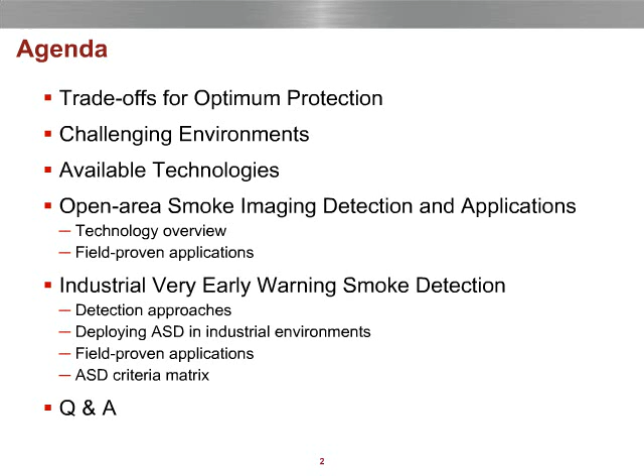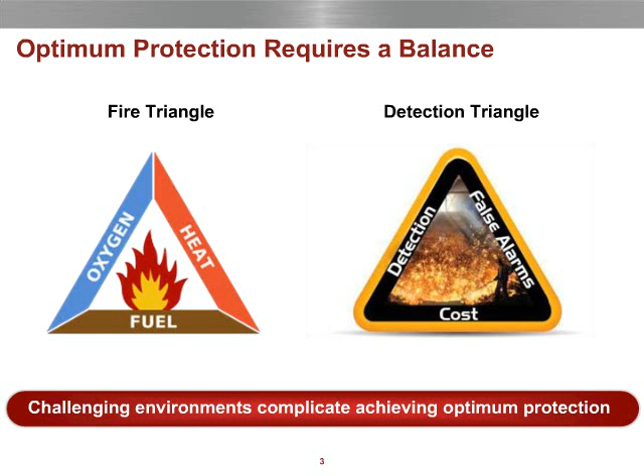We're all familiar with the basic fire triangle. What I'd like to introduce is the concept of a detection triangle, where the three sides consist of the ability to detect a fire, the tendency for nuisance or false alarms, and the cost of installed systems. The objective of the detection triangle is to highlight the interdependence between detection capabilities, the occurrence of false and nuisance alarms, and the total cost of ownership of a system. When this balance is achieved, the net result is an optimum detection solution.

Selecting a detection technology that provides the highest level of detection to ensure protection of property, life, business continuity, and the environment is essential, while at the same time delivering a solution at an affordable cost, both from an initial installation and long-term operating perspective.

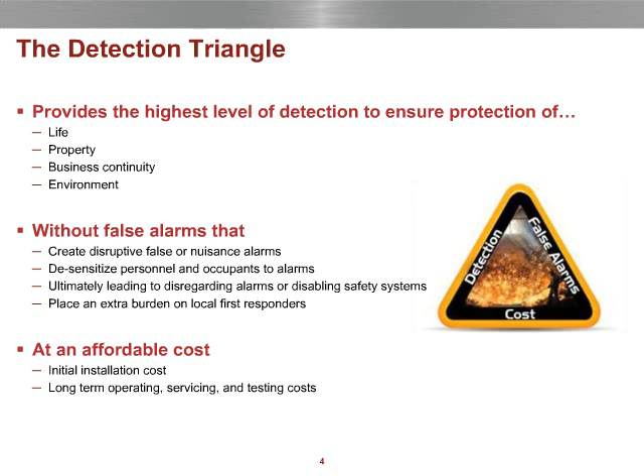Now we're going to discuss the various attributes associated with challenging environments. There are some obvious environmental conditions that make detection difficult, causing false alarms or nuisance alarms, or shortening a detector's life. Additionally, large open spaces with high ceilings or high and variable airflows complicate detection. There's a long list of environmental factors such as dust, dirt, temperature extremes, water, or even the presence of toxic gases, to name a few, that can degrade the sensitivity and shorten the life of a detector.

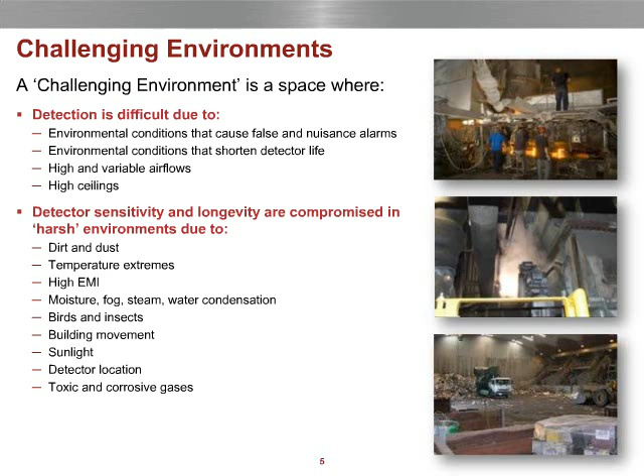Selecting and designing a detection system is very important, but perhaps one of the most overlooked and underestimated factors that contribute to a high-quality, highly reliable safety system is a system's installation and maintenance. Inadequate installation or maintenance can destroy the integrity of a system. High ceilings, confined spaces, elevator shafts, equipment racks, all of these present accessibility issues that can interfere or compromise routine maintenance. Restricted access areas, although not necessarily harsh or challenging environments, can make access difficult, and this also can interfere or prevent routine maintenance from being performed.

When prevention of vandalism or tampering is important for your facility, the ability to install a detector in an unobtrusive manner is required. The same can be said if you have historic buildings or building aesthetics that need to be preserved. When evacuation involves large numbers of people that require assistance, the earliest possible reliable detection and notification is critical.

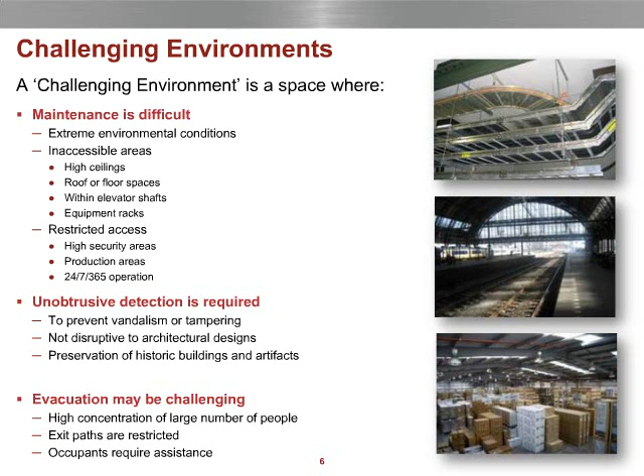This is a simple overview of detector performance characteristics that I've put together to show the relative differences between the various detection technologies that are available. The relative ranking could and will change depending on the specific application.

In this case, I've selected a large open space with high-value content. It shows that aspirated smoke detection affords the best sensitivity to smoke, followed by laser detectors and open-area imaging detectors. It also highlights that ASD would be the best suited to prevent damage to both structural members of the building and or building contents. Aspirated smoke detection, open-area smoke imaging detection, and linear heat detection is shown to be the most tolerant to a wide range of environmental factors.

Additionally, this example highlights the fact that as the size of the space increases, the initial cost differential between spot detectors and aspirated smoke detectors is lessened, if not reversed. It also shows that for large areas, the cost of equipment and installation for both ASD and linear heat are in fact similar.

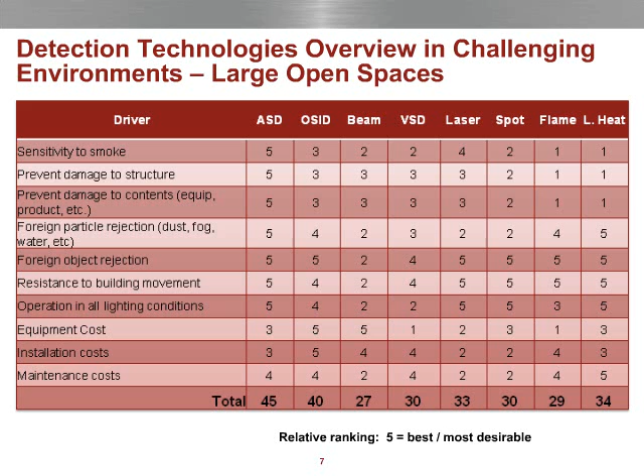In this section of the presentation, we're going to provide an overview of open area smoke imaging detection. Specifically, we'll explore what dual wavelength open area smoke imaging detection is and some of the challenges that it can solve.

Historically, beam detection has proven to be a challenging proposition. This is a sample list of the many things that have caused problems with single light source beam detectors. Innovations have yielded some success in overcoming these challenges, but false alarms because of these things are still commonplace.

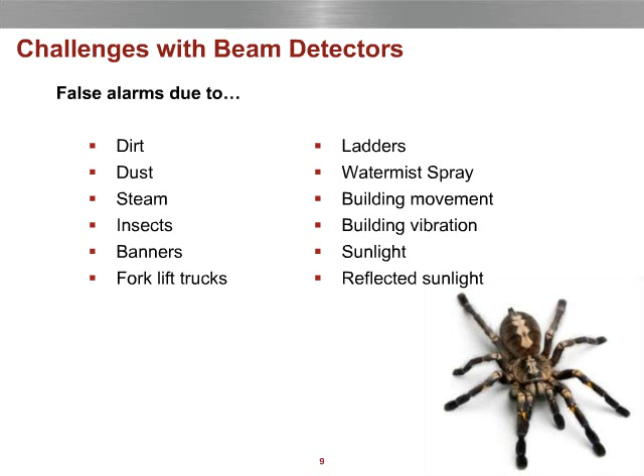What makes dual wavelength different? There are four major improvements to the technology when compared to traditional single IR beam detectors. First, two wavelengths of light are used, both UV and IR. Secondly, a CMOS imaging chip with many pixels, the same technology you would find in your digital camera, is used instead of a single photodiode beam. This provides a wide viewing angle to locate and track emitters.

As a result, the system doesn't require precision alignment and can compensate for drift caused by natural shifts in building structures. The time for installation has been measured to be at least 50%, sometimes up to 60 to 70% faster. In fact, the wide viewing angle enables multiple emitters to be used with a single imager. The imaging chip also provides automatic alignment and movement tracking by software in the imager.

The third major distinction is its unique method for alignment. A ball and socket housing allows a wide range of horizontal and vertical movement. A simple laser screwdriver tool is used for alignment. And fourth, smarter algorithms have been introduced.

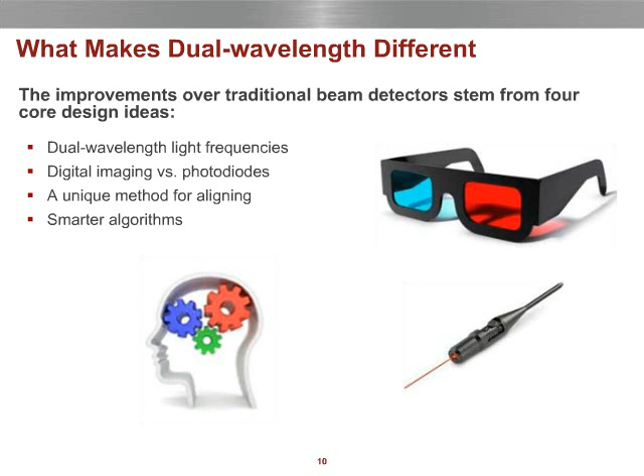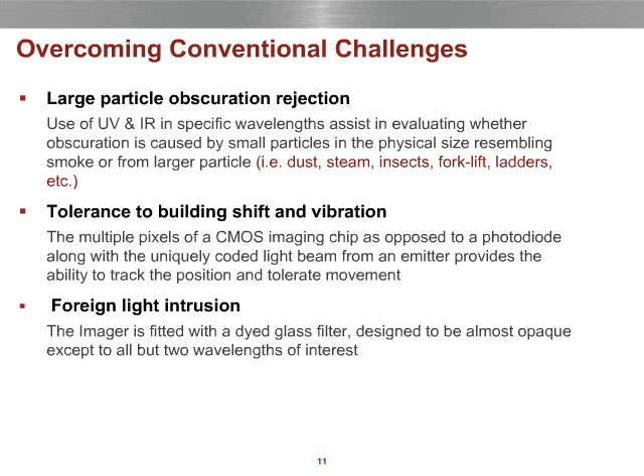The three primary challenges that cause problems with traditional beams are large particle rejection, building shift causing misalignment, and foreign light intrusion. We'll address each of these challenges. This slide shows 3 different scenarios, and I'll explain how a dual wavelength beam transmitting to an imager reacts to each.

Both UV and IR wavelengths outside the human visible range assist in the identification of real smoke compared to larger objects such as ladders, insects, and dust. The 2 wavelengths allow the imager to not only distinguish the size of the particles along the path, but also distinguish the difference between smoke and dust, for example.

The shorter UV wavelength interacts strongly with both small smoke-sized particles and large particles, while the larger IR wavelength is affected only by larger particles. By comparing the relative strengths of the 2, the detector is able to provide repeatable and reliable smoke obscuration measurements while rejecting dust and other solid objects.

The use of 2 beams provides the system with a far superior decision-making process for triggering alarms on smoke while minimizing nuisance alarms. In the bottom scenario, a blockage is shown. The imager loses signal from both beams and will report a trouble, not an alarm condition. If the imager is set on non-latching, once the blockage clears, it will reset itself. Momentary obstructions such as, say, a bird, balls, forklift passing through will not result in an alarm or trouble signal.

The middle scenario shows dust along the path of the beam. Dust particles are large, so the imager will see a small loss of both UV and IR. In this case, it will reject the dust and no alarm or fault condition is reported.

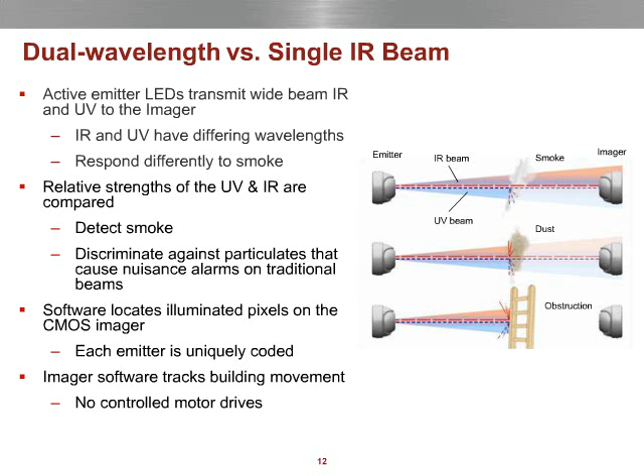There are powerful benefits afforded by the use of open area smoke imaging, specifically the dual beam smoke imaging. The picture shown here is the actual field of view of a 45-degree imager. The diagnostic software is used to produce this image. It's not required to set up the devices. However, it can be useful to make sure that the emitter is actually located in the field of view of the imager. In this case, you'll see 4 emitters in the field of view.

The imager locates and tracks the position of each of these emitters anywhere within its field of view at a pixel level, which allows it to operate under conditions where structure, vibration, or movement exist. In this case, it would take a tremendous amount of movement for the emitters to move out of the field of view of the imager. In fact, the wide field of view allows a plus or minus 2 degree of building movement. At only a distance of 330 feet, this would equate to plus or minus 12 feet. Almost unheard of in the beam detection industry.

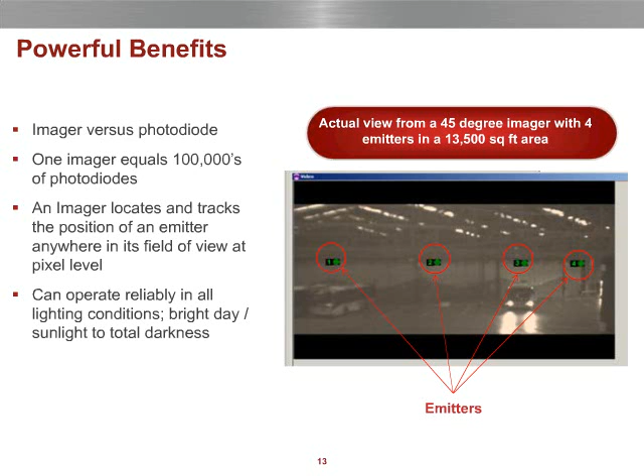Installation and commissioning is really a breeze using dual beam smoke imaging. It's simple. The exact alignment is not required. A unique laser alignment tool is used to only roughly align the emitter at the imager. You'll see one in the picture. This can result in up to a 70% savings in the setup time required, not to mention going back to reset beams that have been misaligned due to various factors.

In addition, when lifted to the maximum of 20,000 square feet, it can outperform traditional beams by up to 50% in length, presently almost 500 feet in length of coverage for one beam detector.

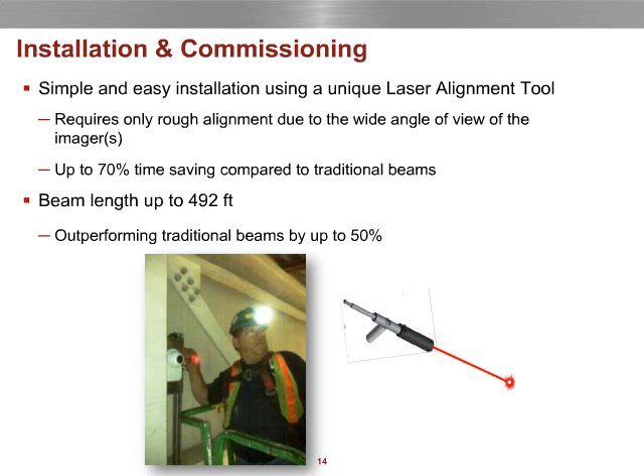Building movement is the #1 cause of false alarms with beam detectors. Correct alignment and commissioning takes the best part of the installation, and it has to be exact, varying from 1 to several hours. Sometimes it even takes 2 technicians to do the work. So instead of gun sights, sight holes, mirrors, thumb wheels, LED and beep aids, and including intensive training on how to set one up, dual beams can be aligned with a simple laser. Because of the only rough alignment, it can be done in just a matter of minutes.

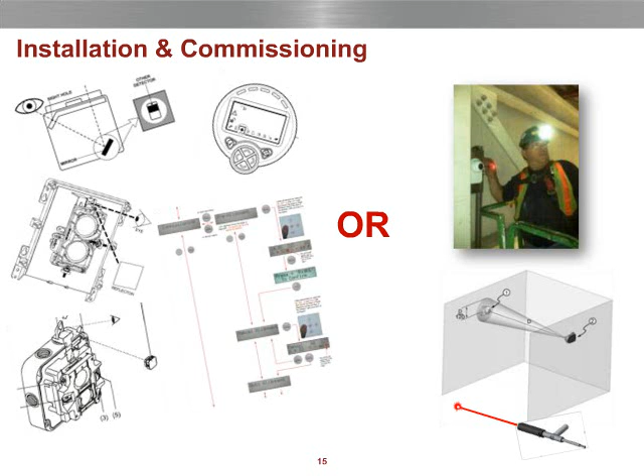What we'd like to do next is take a look at some real-world problems solved by dual wavelength smoke imaging detection. I'd like to mention it works just fine in normal environments. We're showing the more challenging ones today. Anywhere that a traditional beam would be installed, we could use a smoke imaging device.

Let's take a look at long distances. Traditional beams using a single IR wavelength pick up all the airborne particles, which may include anything from dust, steam, dirt, water droplets, etc., you name it. This could result in an amount of obscuration that can be quite elevated during the day. Because of this, traditional beams have to limit their length to sensitivity and vice versa. In fact, it would be hard to have a traditional beam even at a 20% setting at 325 feet.

Open area smoke imaging is unique. It can reliably operate up to 500 feet, again possible only because of both UV and IR being used as the signaling. As both wavelengths are equally affected by larger particles, the possibility of false alarm or trouble signals is almost eliminated.

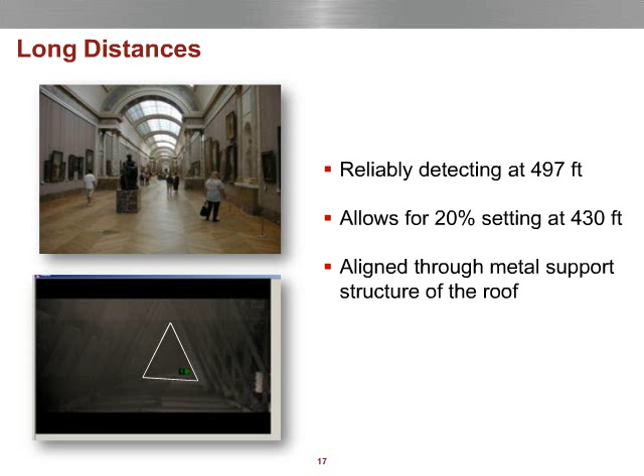The better types of motorized beams need to actually see beside the reflectors they use in order to learn the overall position of the reflector, hence requiring anywhere from 18 to 24 inches of space even to operate within. The detectors at this site were exposed to vibration. There was a large crane that hauls large concrete panels in and out of the building, so the building would shake. It was installed, worked perfectly over 3 months without any faults or false alarms.

The value here to the customer is they had already resigned themselves that the only option was to use a linear heat type device instead of smoke detection. Now they could use smoke detection in the particular space.

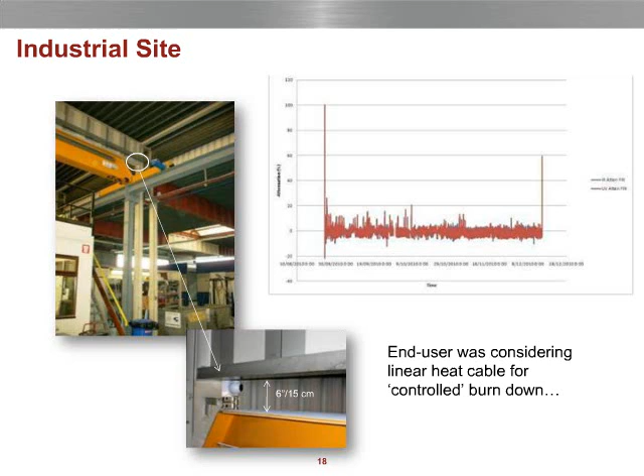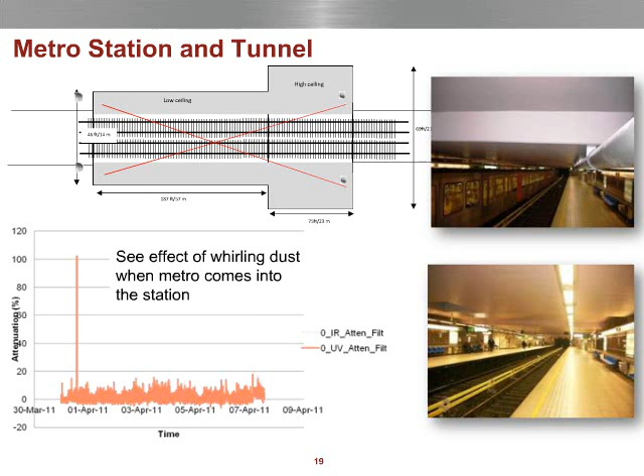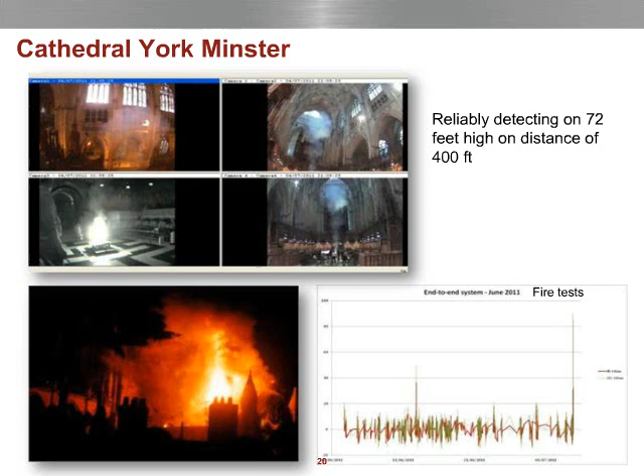This demonstrates the better and higher sensitivity of a dual wavelength detector. Obviously, 20% wouldn't be the setting in this particular case. This sort of information, though, is invaluable when trying to determine the best method of protecting priceless historical sites and at what sensitivity level the smoke detection should be set at.

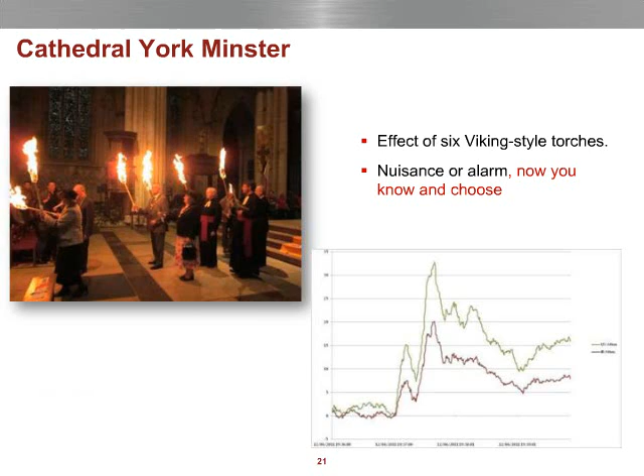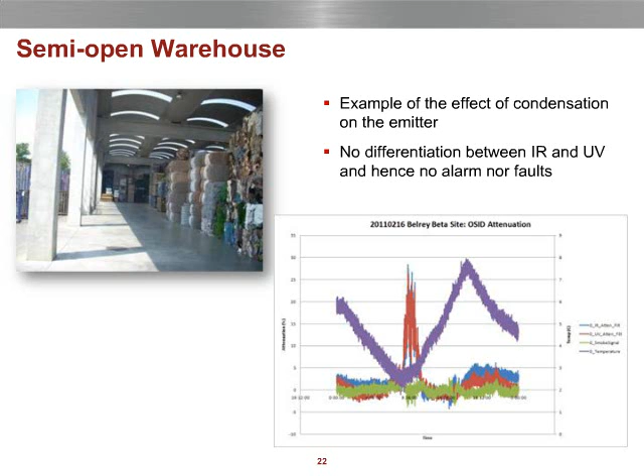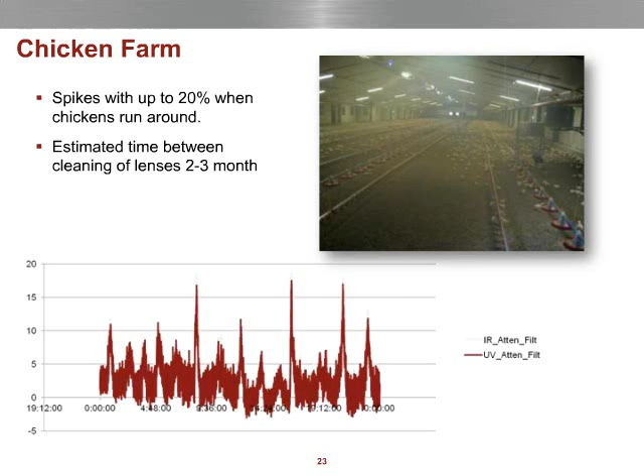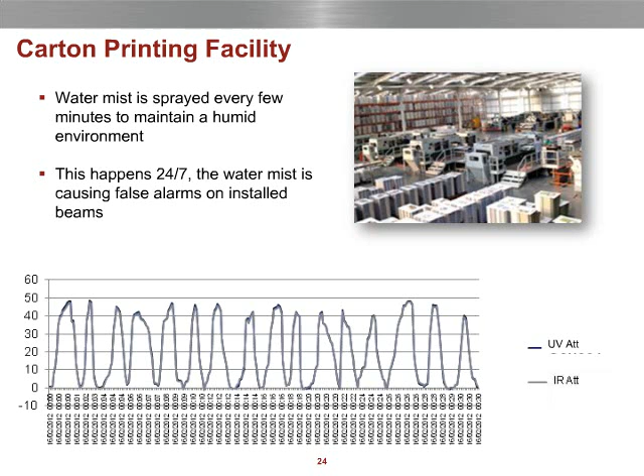One can notice the high obscuration, around 50% in the graph there, each time the mist is re-released. This is a textbook example of where this technology works. Dual wavelengths utilizing UV and IR values did not cause false alarms, and again, they could have smoke detection in an environment they thought not possible.

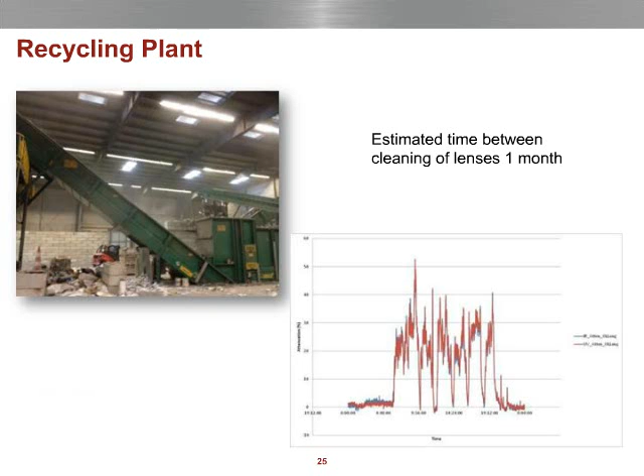Even if one would accept traditional type detectors, beams or spots, and accept to ignore the detection during the day when the people were present, the analysis indicated that lens cleaning would have to be done at least on a monthly basis. This is where industrial type air sampling with filters might have been a better fit. Open area allowed us the opportunity to determine that case.

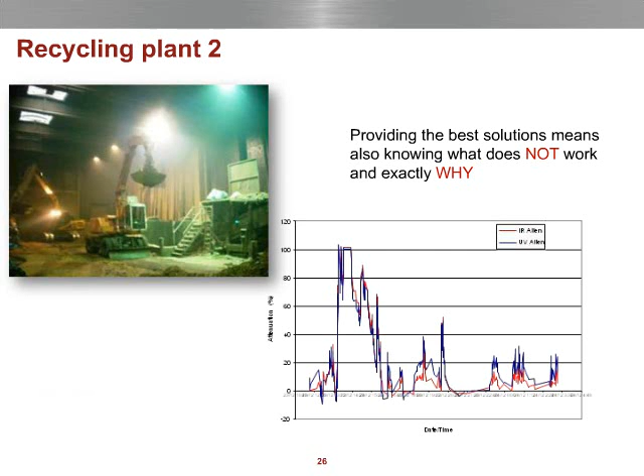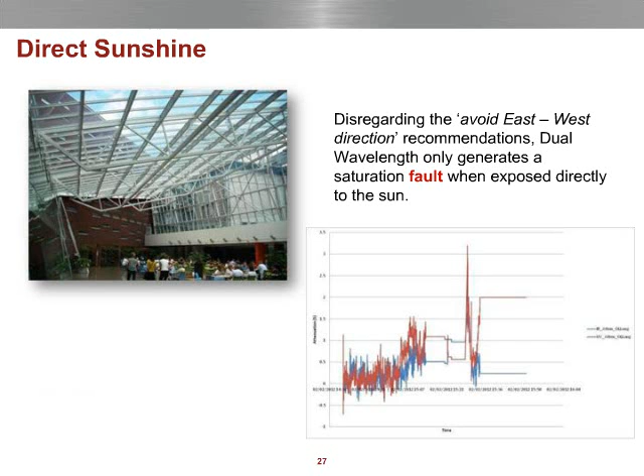Again, dual wavelength can be used in any environment. We've shown you the really hard ones today. And Claudio, I'm going to send it back to you. Well, Steve, thank you very much. You did a great job presenting that technology.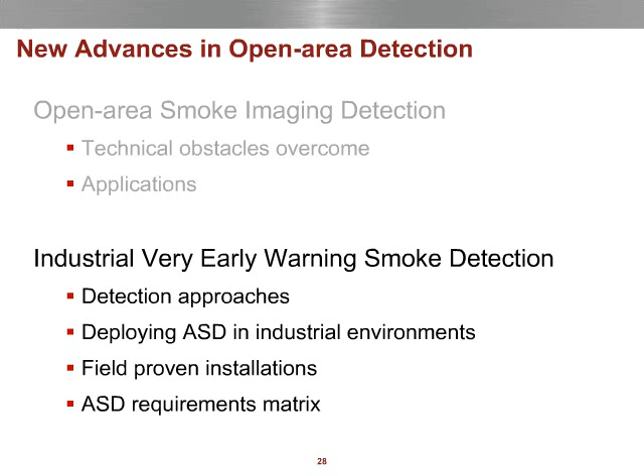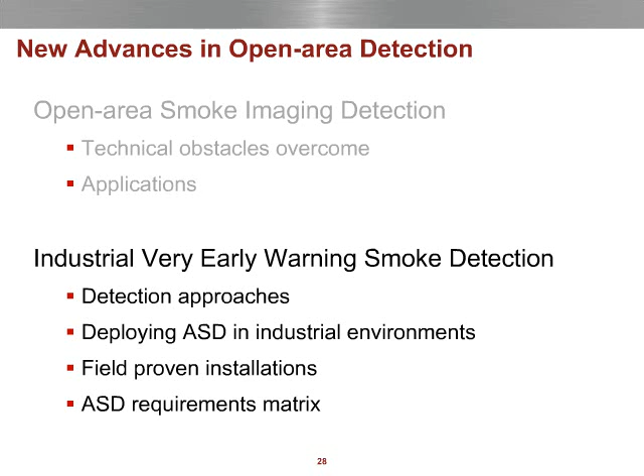Now we're going to shift gears a little bit into a discussion of applying very early warning smoke detection into industrial environments. We're going to review a couple of basic ASD design approaches and how they impact performance, discuss deployment of ASDs in industrial environments, and then we'll follow it by a few proven field installations. And then, as I mentioned earlier, before we go to Q&A, I'm going to present an ASD requirements matrix that you may find useful in helping select ASDs to meet your specific project requirements.

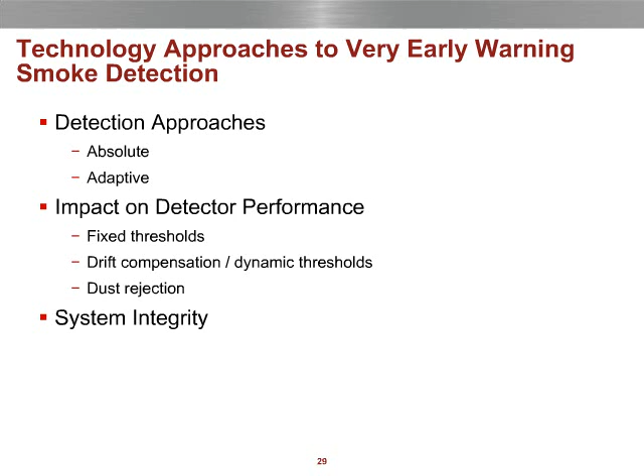So there are several different design methodologies. Today I'm going to talk about two of them. The first is absolute detection. The second is adaptive detection, followed by a discussion of how these approaches are going to impact performance. So let's move on to the next slide here. And let's talk about absolute detection.

It's based on the ability to create a detection platform that can maintain its sensitivity over the life of the detector. One way of achieving this is to utilize a means of keeping the optics clean. This figure shows a clean airstream being passed across the two optical surfaces of the detector. The clean air prevents any smoke or other substances from contaminating the optical surfaces that would ultimately lead to detector drift. This design approach enables you to maintain fixed, consistent, and predictable alarm thresholds throughout the entire life of the detector.

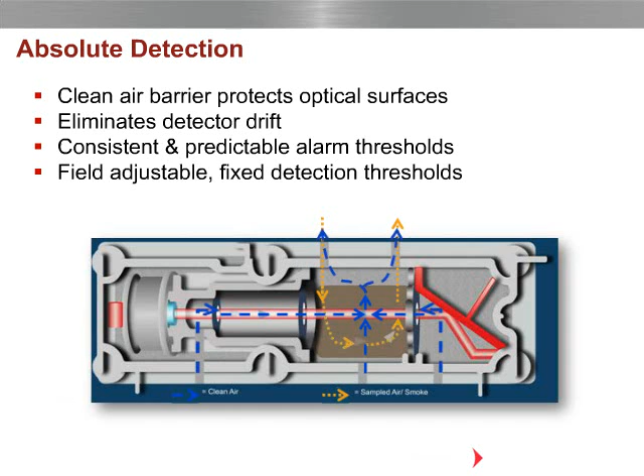But because all environments and background levels are not created equal, the ability to adjust alarm thresholds based on background levels that are present in your environment is important. Here's an example of how it's actually done in the field. The first step is to establish what your background levels are. This is done by measuring and recording the background levels over a period of time. In this case, the average background level is about 0.05% obscuration per foot, with a peak value of approximately 0.12% obscuration per foot.

Once you understand the background levels, you're now able to select your alarm thresholds. These are shown by the four green lines on the graph. The four alarm levels selected for this site were 0.25, 0.37, 0.47, and 0.62% obscuration per foot.

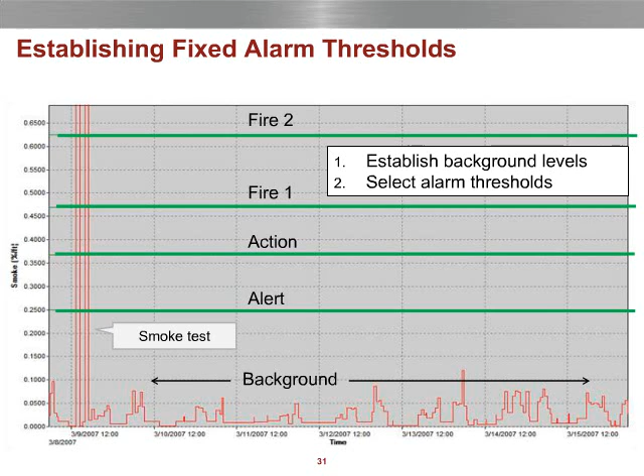Adaptive detection utilizes mathematical algorithms to compensate for detector drift caused by non-smoke particles entering the smoke chamber or electrical interference induced into the detection system. There are two components, short-term and long-term drift. The short-term drift is compensated for by utilizing smoothing algorithms to eliminate short-term non-smoke interference sources. Long-term drift is addressed by adjusting the detector's sensitivity to compensate for changes in sensitivity due to non-reversible contamination or component drift.

This method of detection relies on the ability to predict the rate at which both smoke and contamination enter the detector, or the ability to differentiate between smoke and contamination. The ability of these detectors to compensate for varying environmental conditions results in self-adjusting, drift-compensated alarm thresholds that can change throughout the life of the detector.

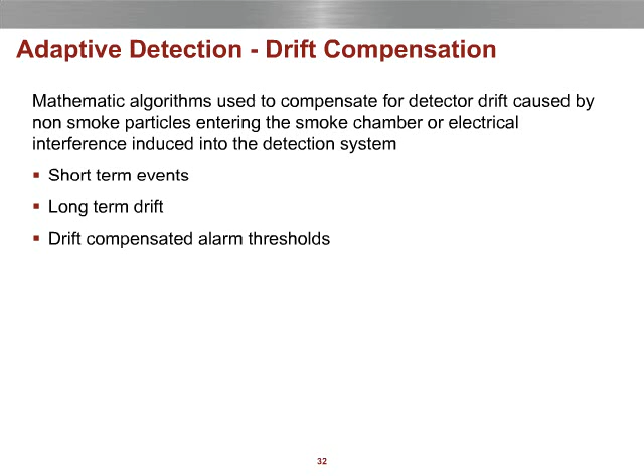The next few slides are going to show basically how these design approaches can impact performance. In this particular example, a smoke test is performed on an adaptive detector. The white line on the right-hand side of the graph is the detector's output during the smoke test. The horizontal red lines are the alert levels of the detector. You'll see that during the test, it actually self-adjusted 3 times, resulting in a significant detection delay.

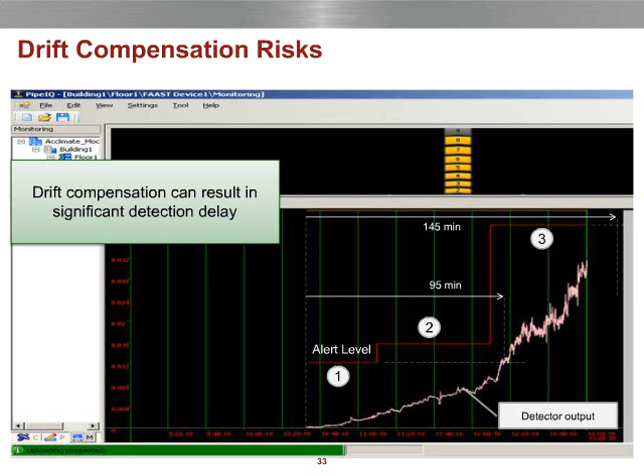What's important when selecting an adaptive-based detection system is to confirm that the fire and contamination scenarios that you expect to occur in your facilities are compatible with the compensation algorithms used in the detectors that you're considering.

Dirt and dust have always been environmental challenges for smoke detectors, regardless of being spot type or aspirated type. But compared to spot detectors, aspirated smoke detection offers more options for dealing with dirty environments. In many instances, all it takes is a good pipe network design to prevent dirt from reaching the detector.

We've already discussed how background compensation can be used to compensate for background levels when you're setting your alarm thresholds. When the background levels or dirt levels are too high, inline filtration can be used. And as with any system, good maintenance practices such as periodic pipe cleaning or installing blowback systems can always help in dirty applications.

Over the years, there have been several patents issued that use multiple wavelengths to discriminate between different particle sizes. These techniques are used to discriminate between white, gray, and black smoke, but they can also be used to distinguish between smoke and other particles such as dust.

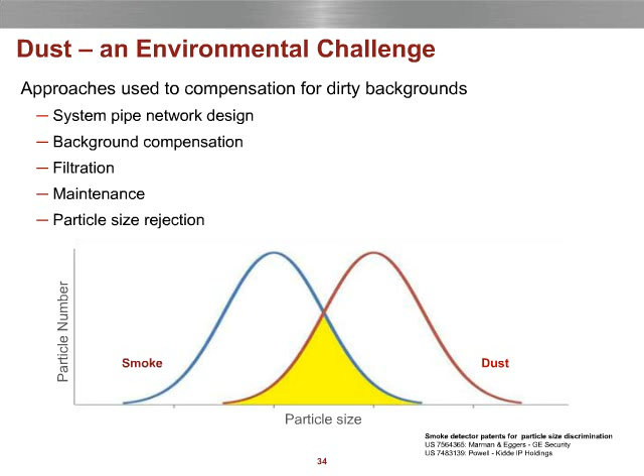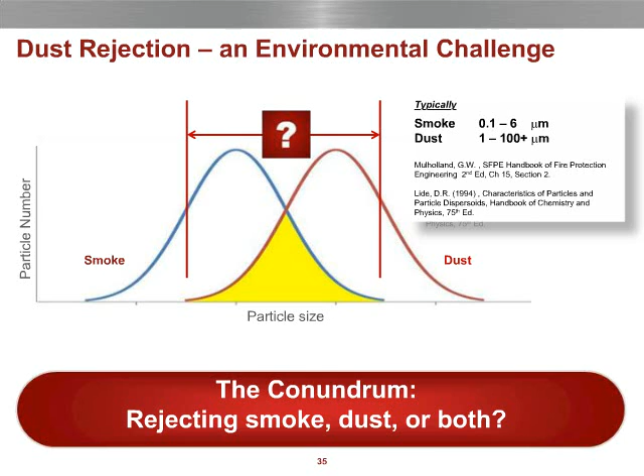The utilization of particle size discrimination for dust rejection is really an enticing idea, but it raises a fundamental question. Are you rejecting smoke, dust, or both? This conundrum arises due to the fact that large smoke particles and small particle dust can be the same size. Discriminating between small particle dust or large particle smoke can jeopardize a detector's ability to detect low energy, smoldering types of fires. These types of fires characteristically generate large particle smoke.

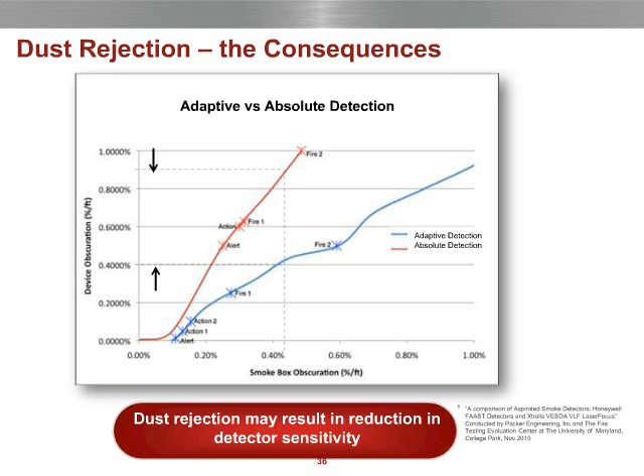What this graph demonstrates is a comparison between an absolute detector and an adaptive detector that also utilizes dust discrimination algorithms. From the graph, you'll see that the adaptive detector is less sensitive than the absolute detector, on average 2 times. Additionally, the adaptive detector did not report any smoke readings below 0.1% obscuration.

This next slide is based on results from an independent third-party test agency, a test that was performed comparing both absolute and adaptive detectors. Extreme care was taken to ensure that both detectors were installed identically. You'll see the pipes are virtually next to each other with sampling holes next to each other. And we also made sure that the alarm thresholds were identical.

In the first series of tests, 4 standard hot wire tests were performed as described in British Standard 6266. Each smoke test was conducted in different locations within the test area. The result shows that the absolute detector took between 130 and 220 seconds to reach its first alarm level, while the adaptive detector failed to alert within 300 seconds.

In the next series of tests, different fuel sources were used: timber, polyurethane foam, heptane, and paper. The test results show that the absolute detector responded sooner to all fires, both initially and throughout the entire evolution of the fire. The data also indicates that smoldering fires present a greater detection challenge than do flaming fires.

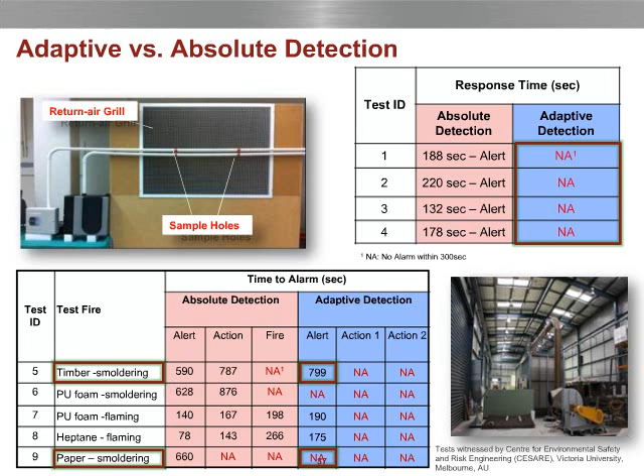Now let's talk a little bit about supervision. Supervising electrical integrity, although mandatory by the standards, is not in and of itself sufficient. Chamber detection must be monitored, and in reality is pretty easily achieved because of the technologies that are used. Light scattering or particle counting are 2 fundamental technologies, and since both of these technologies are active, they lend themselves very well to being monitored.

Flow monitoring is also required for all ASD systems, but it's important to note that any flow monitoring cannot be shut off or bypassed without raising a system fault. And now we talk about filters, and there are several methods being deployed when it comes to filter monitoring. Some detectors actually don't even supervise the filter and rely on a flow fault to indicate the filter being plugged, and in some cases actually allow you to replace a new or reused filter without even operator confirmation.

Other manufacturers use a timer to track filter life. An active means of monitoring filter life is achieved by the use of particle counting techniques. And recently, a new intelligent filter has been developed that actually quantitatively monitors the actual filter's performance.

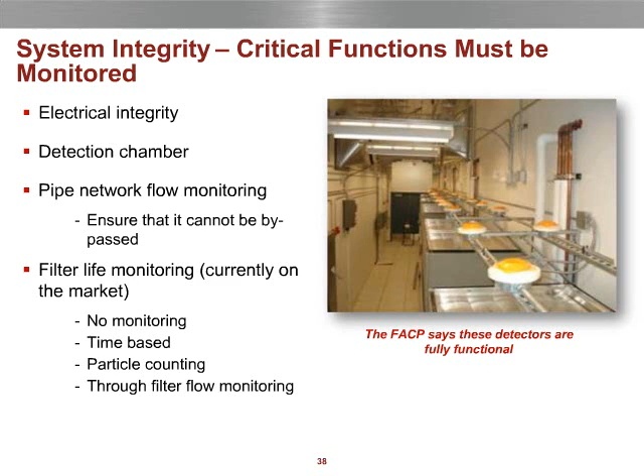This is an example of time-based filter monitoring. Fundamentally, what it points out is that because time-based monitoring does not take into account the environment that the detectors are installed in, filter failure or loss of the ability to detect smoke can occur due to high dust loading prior to the filter's time limit being reached. In this particular example, the detector filter is reported as satisfactory by the system, even though the detector's sensitivity was dramatically reduced by over 60%.

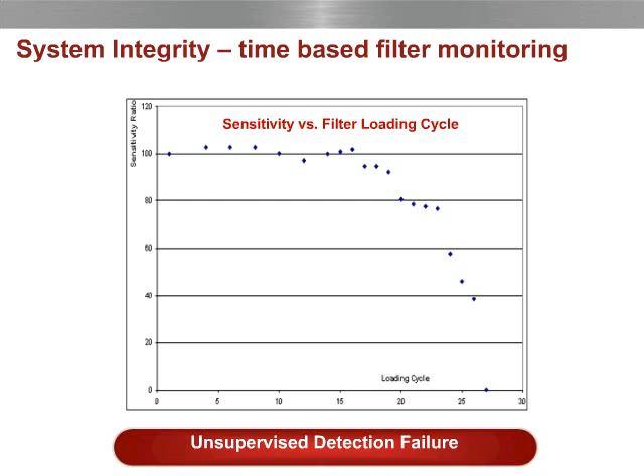Previously, I mentioned a new filter technology. Here's what makes up that filter. It basically consists of dual sample paths, dual flow sensors, and a HEPA filter.

The air enters the filter from the top, from the sampling pipe, and at that time it's split into two airstreams, one larger than the other. The smaller airstream is left unfiltered, while the larger airstream is passed through a HEPA filter that removes contamination. Then both of these streams are recombined, creating a sample that actually has reduced contamination levels.

The recombined stream then enters into the detection chamber. The ratio of the two flows is measured throughout the life of the detector and is used to optimize sensitivity over the detector's life.

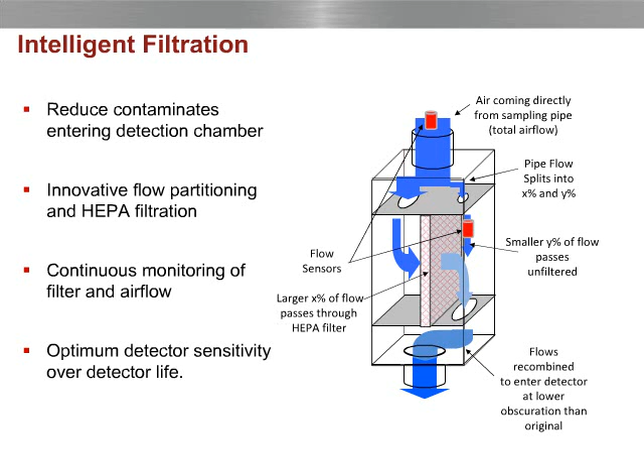So now let's move on to a discussion of deploying ASDs in industrial environments.

If I were to survey the audience today and ask about ASDs, a general perception in the market is that ASDs are designed for use in clean environments, and that applying them in industrial environments is just beyond their capabilities. This perception remains true today, even though ASDs have been successfully installed in industrial applications for more than 10 or 15 years.

This skepticism is due in great part to the fact that special system application engineering was required before an ASD system could be installed in an industrial environment. It's basically a result of product shortcomings in the ASD products themselves that led to the need for special application engineering or extensive maintenance to keep them operating properly.

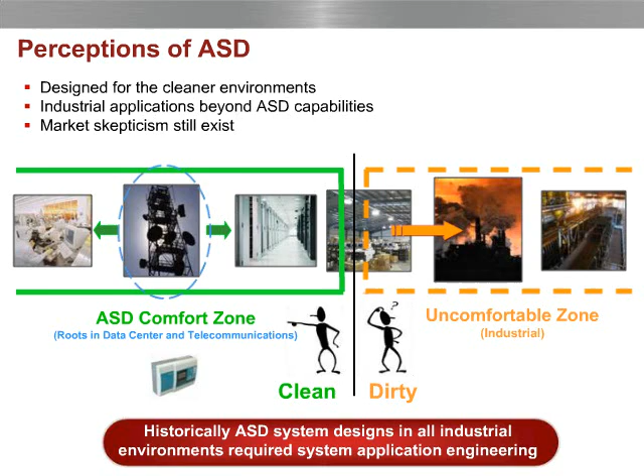So to eliminate the need for special application engineering and extensive maintenance, there are a few product shortcomings that have to be overcome. These include the need for secondary protective enclosures, and the ability to have longer pipe runs required, because many industrial facilities are just larger and require longer pipe runs.

Better visibility of the status LEDs would be helpful because industrial spaces definitely have less than optimum lighting present. But perhaps the most problematic of all features again gets back to filtration. The use of external filters requires a high level of servicing and maintenance. Eliminating the need for external filters would overcome many of the obstacles in applying aspirated smoke detectors in industrial environments.

Additionally, a product with field serviceable modular components would not only reduce downtime, but also reduce spare part inventory and inventory cost.

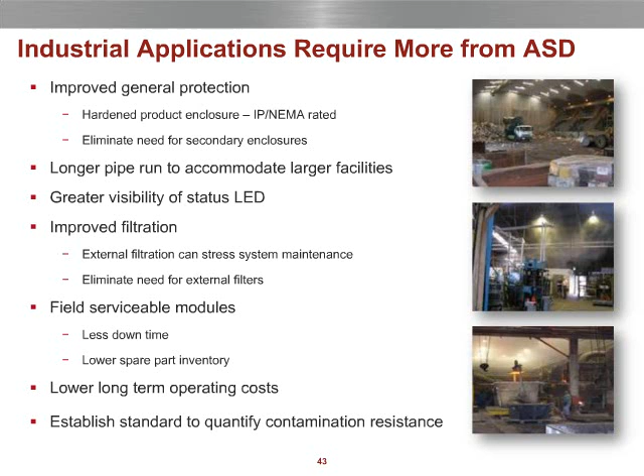As we see aspirated smoke detectors entering into more industrial environments, a need exists to establish a minimum performance level as it relates to contamination resistance for aspirated smoke detectors.

A new aspirated smoke detector has recently been introduced in the market, and it has a set of unique features that include an IP54 enclosure, equivalent to a NEMA 3R, intelligent filtration, 1,200 feet pipe capacity, high-intensity LEDs, and 100% serviceable modular components.

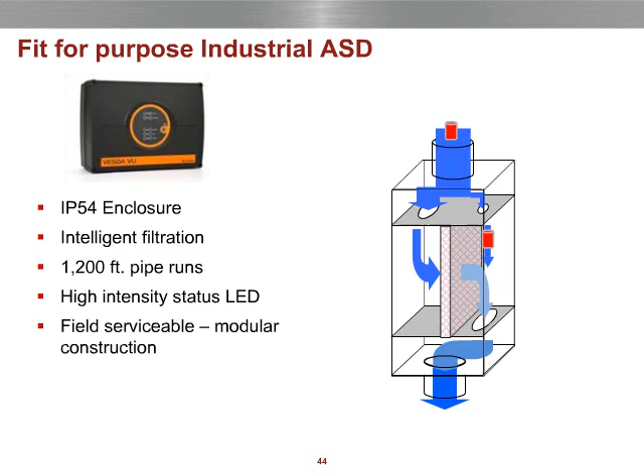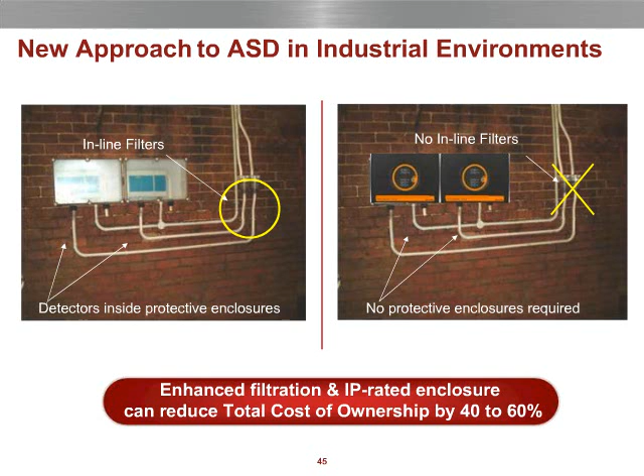The image on the right depicts how the same unit, designed specifically for use in harsh environments, would be deployed. There's no secondary protective enclosure or need for external filters. These enhancements in and of themselves can lead to up to a 60% reduction in total cost of ownership.

In addition to eliminating the need for secondary enclosures and external inline filters, you could further reduce the total cost of ownership by going to the completely modular design. This eliminates the need to have complete emergency backup units on hand, and would significantly reduce the number of spare parts required.

Modularity is also going to reduce the amount of downtime when an inadvertent failure occurs, because you're only going to have to replace the impacted component and not have to replace the entire detector.

We're going to change gears a bit now and have a quick review of 4 applications that have been installed with this product. 2 installations are in the U.S. and 2 installations are in international sites.

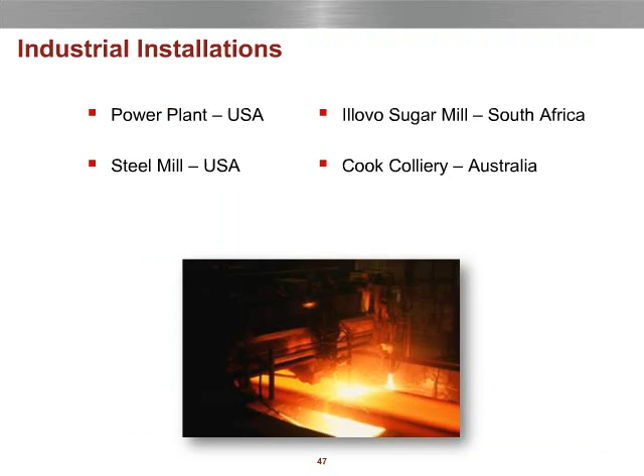A major power company in southern United States selected and installed this detector to protect their boiler feed pumps. Boiler feed pump fires are a common occurrence in power plants. The pumps are used to deliver high-pressure lubrication oil to the turbine's bearings.

It's common that the bearings over time and other joints leak lube oil, and it releases the lube oil into the insulation surrounding the equipment. Over time, the lube oil accumulates and ultimately builds up to a concentration where it can ignite.

Conventional spot smoke detectors just can't survive the ambient temperatures of this application. A boiler feed pump fire can result in shutting down both the boiler and the turbine, costing the utility millions of dollars. What's interesting is that literally within a few days of installing this particular detector, a small fire was detected. So small that they were able to walk up to it and extinguish the fire with a small handheld fire extinguisher. They repaired the installation, and the production power generation continued unimpeded.

This same company also decided to standardize on the same detector to protect their battery rooms against both fire and gas leaks. To cover the gas, what they did is they added an aspirated hydrogen gas detector to their aspirated smoke detection system.

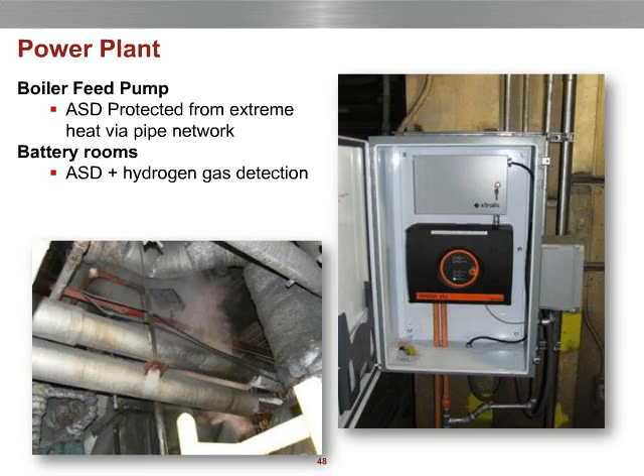This next is an interesting example. It's a major U.S. steel company, and what they had is a need to protect the tunnel that was located under a 300-foot electric-fired reheat furnace. The furnace utilizes nitrogen to create a protective atmosphere within the furnace. Their primary concern wasn't fire. It was actually about protecting personnel that regularly walked through the tunnel on a 24-hour basis. They were concerned that nitrogen leaking from the furnace or from the delivery system would create an oxygen-deprived environment in the tunnel.

The company's original intent was only to install fixed-point gas detectors, no smoke detectors. They ultimately decided to install a combination ASD plus gas detection solution throughout the tunnel to protect, one, against oxygen deprivation due to the potential nitrogen leakage, but two, against fire that could come from cabling that was co-located in the tunnel. They had totally overlooked the possibility of a fire in the space until they walked through and realized that they did have a source of fire with their cable. So they were basically able to kill two birds with one stone.

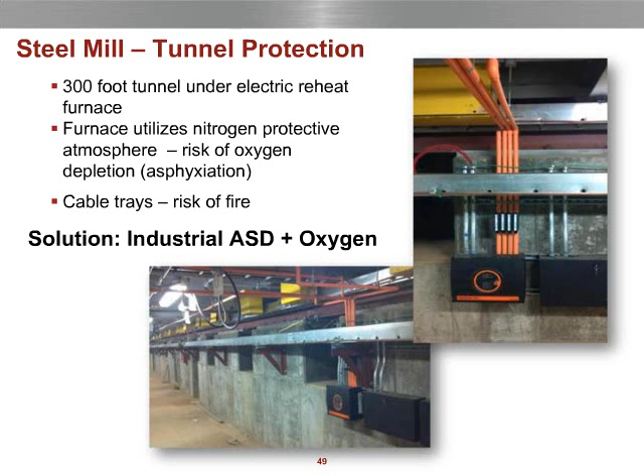Cook Colliery. It's a coal mine located in Australia, and it was another trial site. This site was selected because we basically couldn't think of a much harsher environment to truly test and challenge the product. One aspirating smoke detector and two carbon monoxide detectors were installed within the mine. Four pipes were used, ranging in length from 130 feet to 230 feet. The system monitored conveyor belts, drive shaft units, and pit isolator areas throughout the mine.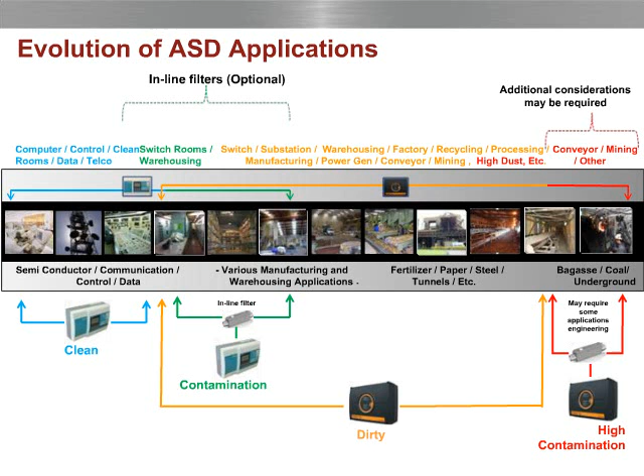With the introduction of an industrial aspirated smoke detector, the routine use of ASDs is going to increase into this space, while the need for application engineering support and enhanced maintenance regimes will be significantly reduced, if not eliminated. But it's not a cure-all for everything. Having said everything that I've said, there are still some very harsh environments where application engineering and enhanced maintenance are still going to be required.

Now, before we start our Q&A session, I'm going to propose an ASD requirements matrix for your consideration. The idea is to lay out a simple matrix that you can use to perform side-by-side comparisons between various available technologies. And here's an example of how you might do it. When you're looking at technology, just ask yourself some questions.

How important is it to have consistent alarm thresholds? Do you need to have deterministic alarm thresholds that you could dial into a particular value, or are relative thresholds acceptable? Would you like to be able to compensate for environmental background levels that are going to be different in different locations, even within a facility? And how important is flow monitoring that can't be bypassed or tampered with? And is active filter life monitoring really required, or is a simpler method such as time-based monitoring sufficient?

The last bullet point, the ability to quantify contamination resistance, this is targeted right at harsh environments. Currently in our industry, there are no benchmark tests to assess a detector's sensitivity resistance to contamination. So this proposal is intended to establish that baseline.

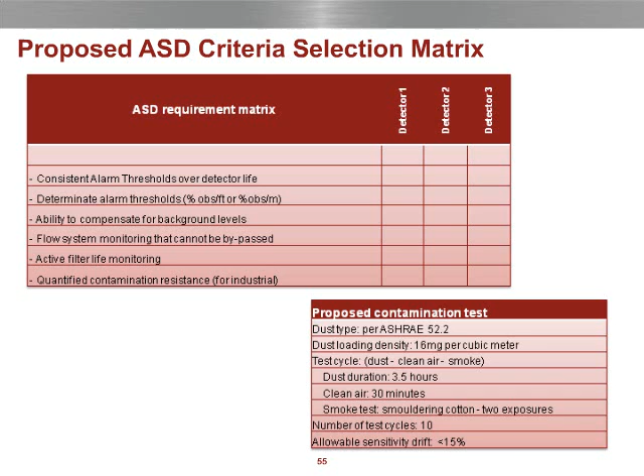There have been several questions from attendees related to maintenance issues in dirty environments. Specifically, one question was: what enclosures are available to prolong the need to clean the lens of the system in a consistently dusty environment?

Well, thanks for this question. There's two sides to answering that. Basically, if dust will drop down or attach to a unit, whether it's in a box or standing on its own, it really won't make a big difference. Now, we've seen people using a compressed air pipe that in a dusty environment will keep the lens clean continuously, or do a puff whenever required. The second thing is that the dust on the lenses is continuously monitored, and whenever we reach a level of about 20% contamination, we'll signal that the lenses need to be cleaned. That doesn't mean detection is dead at that point—it will still continue to detect alarms. It just means that to provide a good range of detection, the lenses should be cleaned so they don't obscure totally, because with total obscuration we cannot detect anymore.

Next question, please. Another question asked by many attendees has to do with listings and certifications by independent laboratories like UL, ULC, and FM Global. So what listings and certifications does this system carry?